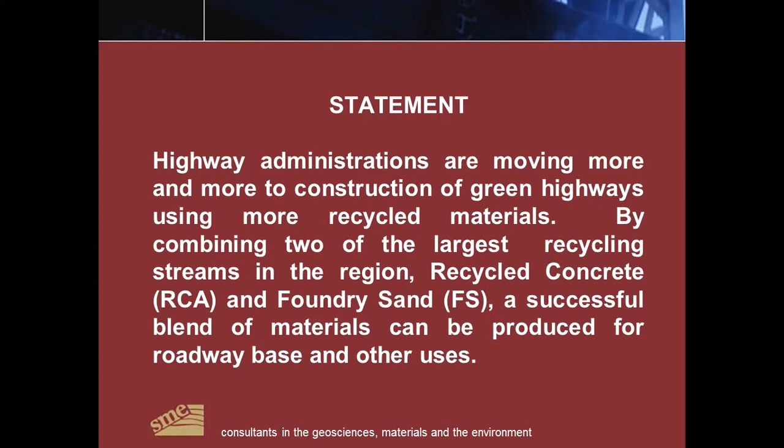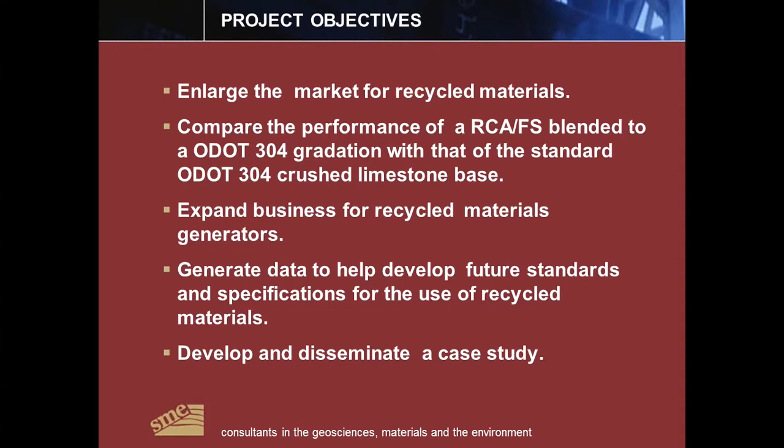The project objectives were to enlarge the market for recycled materials, to compare the performance of a recycled concrete foundry sand blended aggregate, blended to an ODOT 304 gradation, with that of the standard ODOT 304 crushed limestone base, to expand business for recycled material generators, to generate data to help develop future standards and specifications for the use of recycled materials, and to develop and disseminate a case study.

Our project was a Rails to Trails project located in Cuyahoga Heights. The location is a suburb of the greater Cleveland area. It's located just north of Interstate 480 and east of Interstate 77.

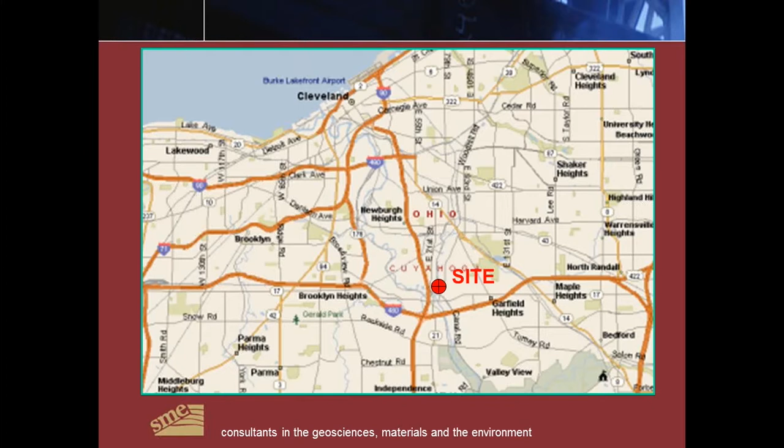This aerial photograph shows the old railroad subgrade with the track still on it. Our project area, our demonstration area, is the area marked in red. The Cuyahoga Heights maintenance garage is located here. After this picture was taken, they constructed another maintenance building, and in 2012 they constructed an access road off of our main entrance into the facility here.

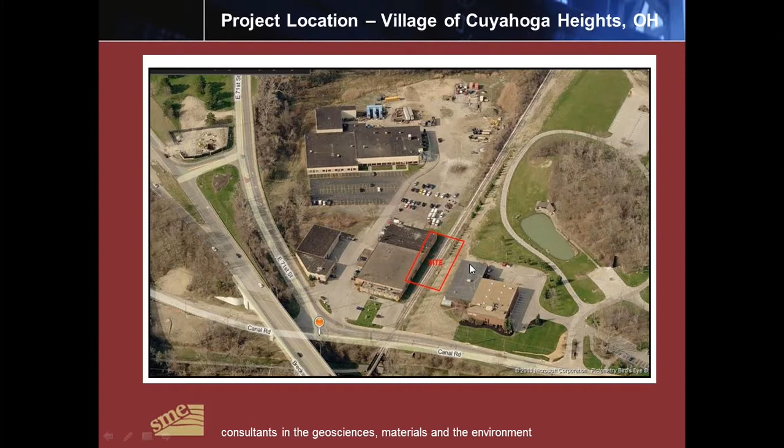This plan view shows our actual test section areas. This first section here is the standard ODOT 304 limestone. The second section here is the recycled concrete foundry sand aggregate, and we had a third section with a different material in it. As part of the original study, there were soil borings conducted along the railroad right-of-way, and in addition to that, there were several static cone penetration tests probed into the subgrade to give us a better understanding of the relationship of the subgrade to the natural subgrade.

As part of the project, we also installed two lysimeters located under each of the primary pavement sections, called lysimeter A and lysimeter B, and we collected groundwater flow through the base course and did analytical testing on those water samples.

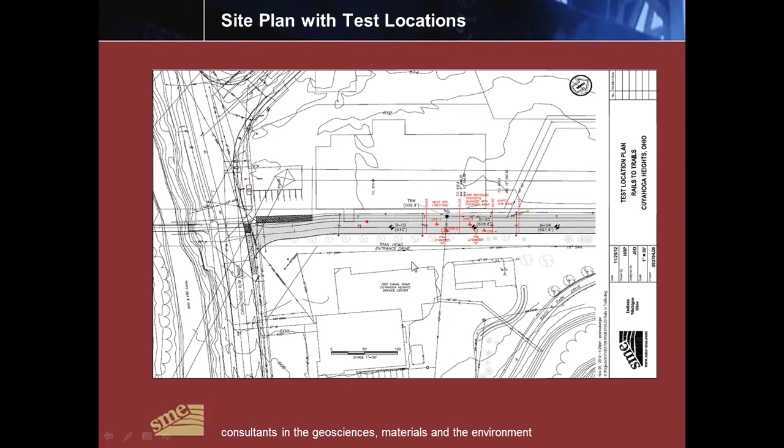This is just a view looking south back towards the main road. Our crushed aggregate limestone is in the first section. The second section here is our recycled concrete foundry sand blend. These arrows are pointing to the approximate locations of where the lysimeters are placed. The subgrade slopes from the right side of the photograph down to the left, and then along this left edge is constructed a French drain collection system to help keep the base course permanently drained beneath the pavement.

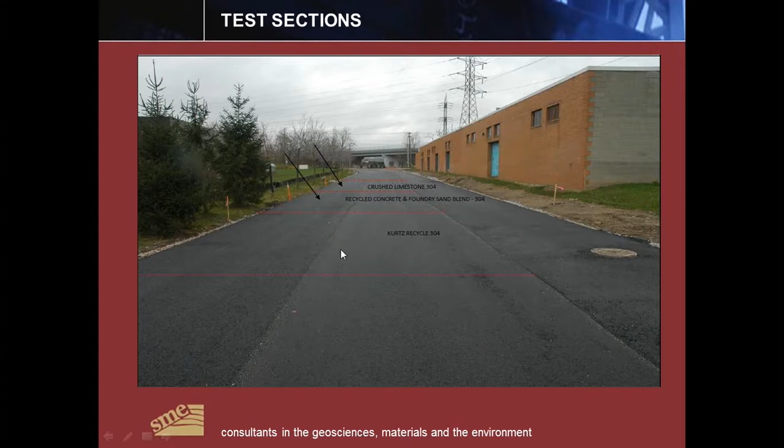Our subgrade was a railroad ballast that was placed in the early 1900s. Back at that time in the greater Cleveland area, they used a lot of cinders and slag mixed with coal and other building material. This profile here is fairly standard throughout the section. There's about 5 feet of this fill, and it's placed over a soft to medium consistency clay. Generally, the fill material was dry. We have not seen groundwater accumulating in the base over the top of the subgrade.

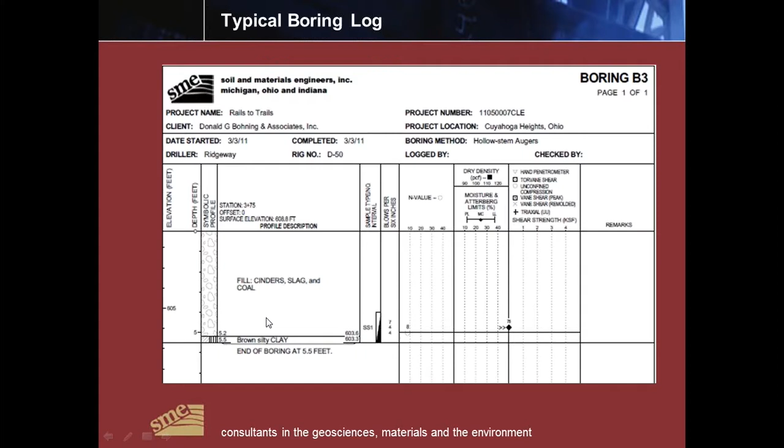Static cone tests revealed that we have an upper layer here, which is the fill, and it shows a nice granular crust by the cone resistance, followed by a weaker profile for the clay. Generally, these cone resistance numbers, when they're 20 or above, you would assign just a basic bearing pressure of about 2,000 pounds per square foot for this material.

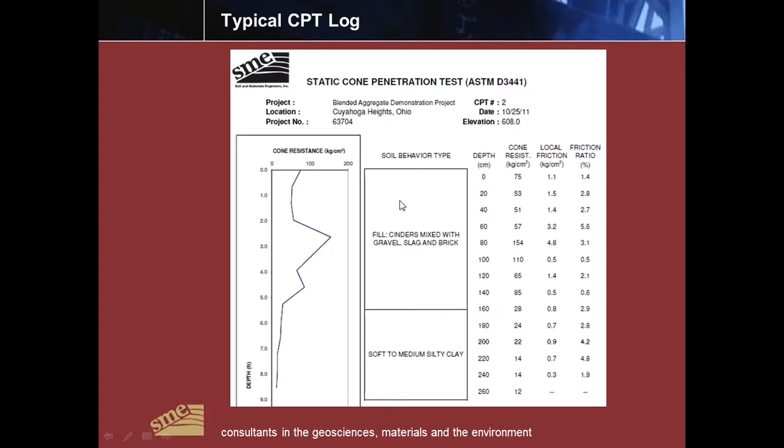The project had a design pavement section that we had to incorporate into the study. It consisted of 10 inches of asphaltic concrete, made up of the surface, intermediate layers, and the bituminous base, placed over 10 inches of ODOT 304 crushed limestone as specified. In our situation we kept the base course thickness uniform throughout the test sections.

With the ODOT section here, it has a calculated equivalent structural number of 5.08. Keep this number in mind as we get into the falling weight deflectometer test later on, where we'll compare that to the design number.

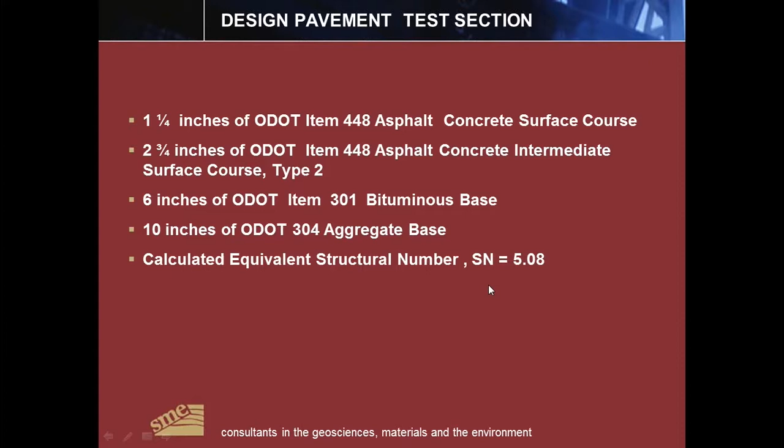We did several laboratory tests on the different materials in this project, including the subgrade fill cinder material. It had a low CBR of 2, a high percent passing the 200 sieve at 23%, which is predominantly a silty material, not clayey. It's a relatively light relative density of 101 pounds per cubic foot and an optimum moisture content of 18%.

We didn't run a lot of other tests on the recycled concrete other than an initial gradation and a fines content, so that we could take the recycled concrete and break it into different constituents and blend it with the foundry sand. Our foundry sand material had a CBR value of 18.

The foundry sand had 9.5% passing the 200 sieve. Typically with foundry sands in our area, this number is usually around 2 to 3%, but the source we were using for this project was slightly higher. It also had a little higher maximum density than normal, which was usually about 109 pounds, and our optimum moisture content was slightly higher than typically seen for foundry sands.

Our blended aggregate, the 304 recycled concrete with the foundry sand, had a CBR of 34, P200 of about 8%, density of 119, with an optimum around 13.

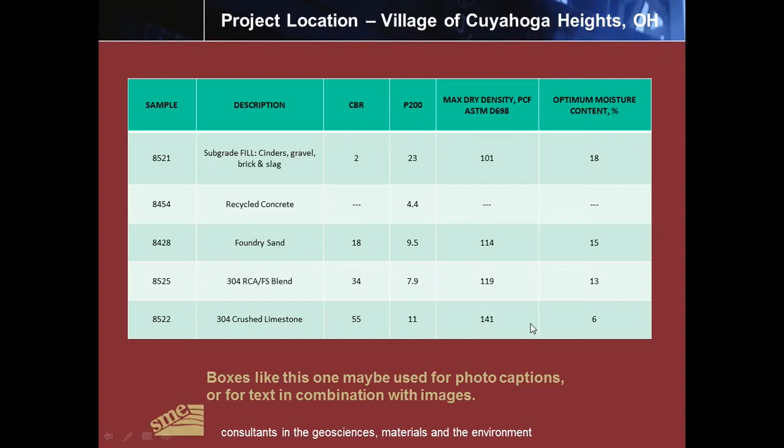This is just a gradation curve for the subgrade material, showing that it is a well-graded cinder material that is predominantly granular.

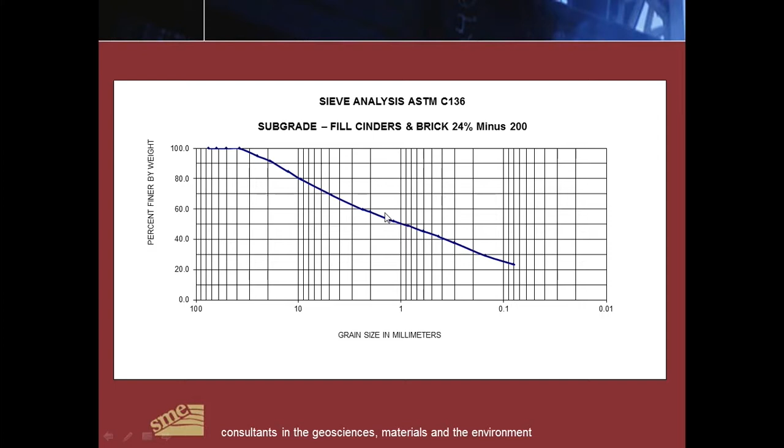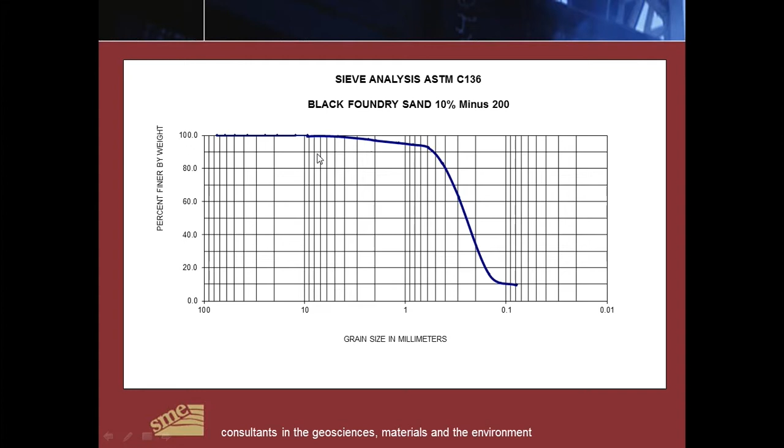This curve is for the foundry sand constituent. It shows that the foundry sand material is a poorly or uniformly graded material with about 10% fines in it. Again, typically our foundry sands run cleaner than this, but in this project we're using a certain source of material.

The final combination of materials shows the ODOT gradation with the upper and lower bounds in red. The yellow or orange curve here is the ODOT limestone material, showing a pretty well graded material with less coarse aggregate in it than what our blended material has. So our blended material had a little bit more top end sizes in it and was cleaner than the standard 304 material that we used.

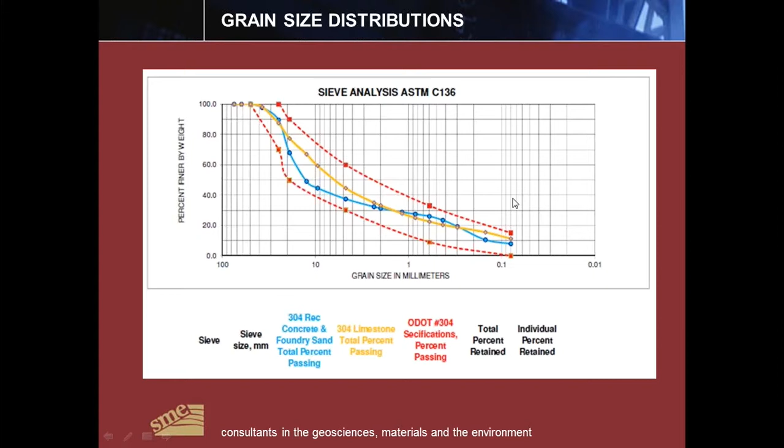In preparation for the road bed, the railroad ties and rails were removed, and the coarse ballast at the top of the pavement was stripped. The subgrade was then heavily proof rolled and compacted with a vibratory drum roller. The proof roll was stable under the loaded aggregate trucks, but you'll see later that the compaction or density tests are lower than what you might expect.

Once the subgrade was stable by proof rolling, we cordoned off our sections, installed the lysimeters, and then placed our base course materials. Once the base was placed, we used a smooth drum vibratory roller to compact the materials to obtain their final densities, then placed the asphalt layers over the top and tested the asphalt.

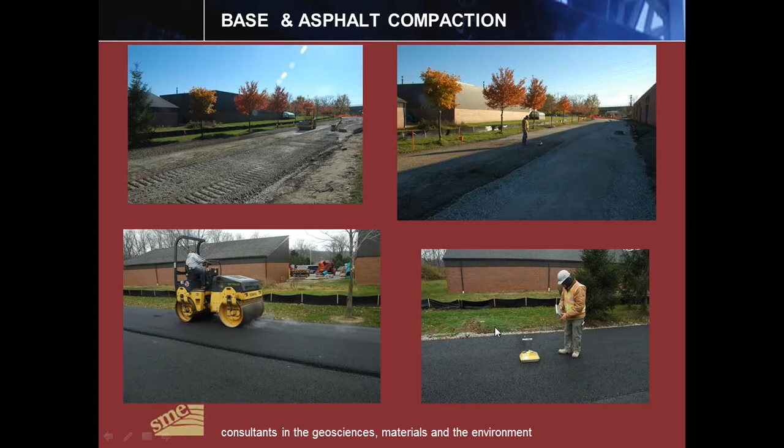The compaction results are as follows. The subgrade material, the cindery material, only achieved a compaction of 81%. You can see that its optimal moisture content was at 18%, and we were 2% over optimum, which makes this material a little more difficult to get greater densities.

But like I mentioned earlier, the subgrade was stable under the proof rolling with the loaded tandem axle dump trucks. The limestone section obtained 95% compaction, and the recycled concrete aggregate achieved 99% compaction. The additional rolling on the limestone did not improve the density any further, so we reached a maximum density with the size of equipment they had on site.

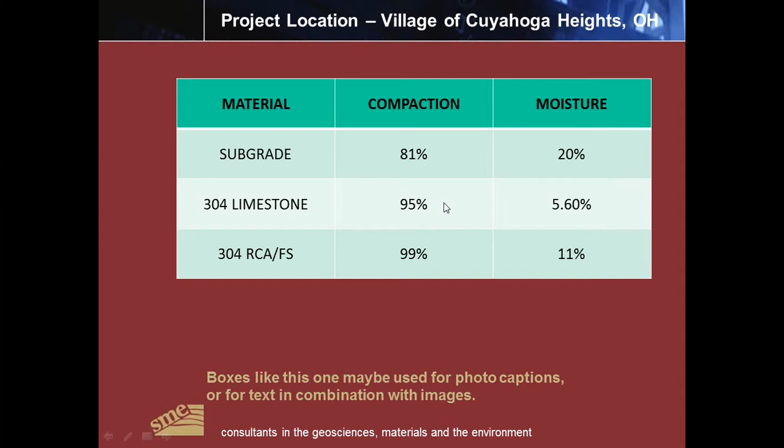Once the pavement was completed, and this paving project was completed in December of 2011, we ran falling weight deflectometer tests on the pavement on both the inbound and outbound lanes. The inbound lane is called lane 1, and the outbound is lane 2.

Lane 1 is closer to this lower edge of the asphalt where the curb drain is located. Right now the position of the truck is really sitting over lane 2.

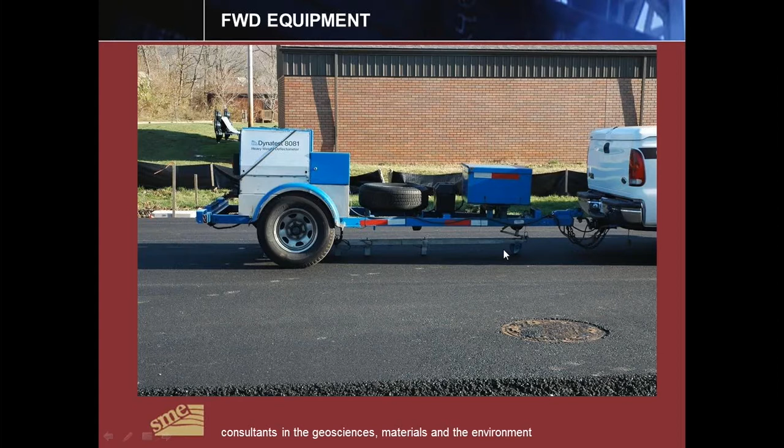You can see on the falling weight deflectometer equipment you have sensors along this bar that are picking up deflections as the test is conducted. This is just the back of the deflectometer showing the foot that imparts the load into the pavement. This is the weight that is lifted and dropped, and then we have another sensor down here for checking the temperatures of the pavement at that time.

Right now the truck is set up on the inbound or lane 1. You can see its relative position to the edge of the pavement or where the curb drain is.

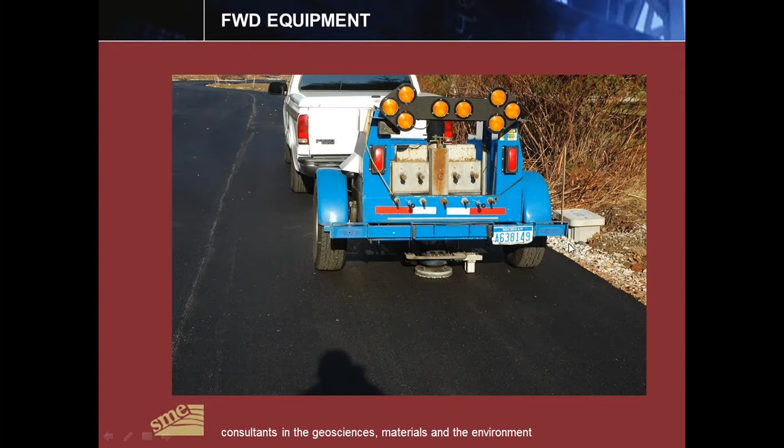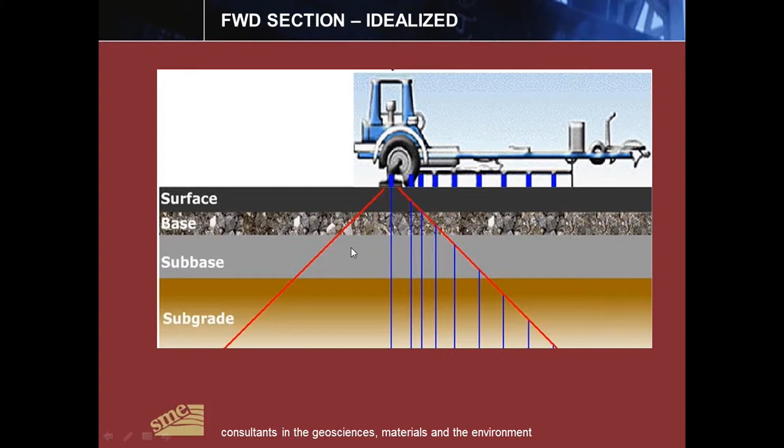Falling weight deflectometer imparts a load into the subgrade. That signal is sent down through the subgrade and is picked up through the deflections of these sensors along the trailer here. The maximum depth of this heavyweight deflectometer is capable of sensing things down to about 15 feet. From that, the data can be analyzed and the pavement materials or sections can be removed from the overall data.

This presents the data after our test in December of 2011. This data is not temperature corrected to 70 degrees; it's the original temperatures that the pavement was at the time of the test. You can see the upper number here plots lane 1 and lane 2. You can typically see on these curves that lane 1 numbers are lower than the lane 2 numbers. We think this is due to the proximity to the edge of the pavement and also to the trench drain that runs along that edge.

The average structural number for the limestone paving test section was 4.28, whereas the average structural number for the recycled concrete aggregate foundry sand blend was 4.32. Rounding these off, you can see that the structural numbers were essentially equivalent. This demonstrates that initially the recycled concrete is working or functioning as a structural part of the paving section as well as the limestone base material.

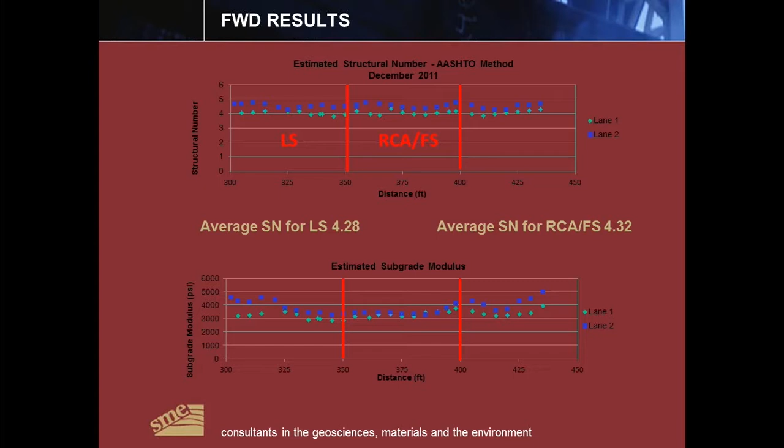We came back in July of this year and ran another falling weight deflectometer test, after 2 winter cycles on the pavement section. This graph plots, there are 2 separate figures I'm going to show here, and this one is for lane 1, temperature corrected to 70 degrees, so the 2011 data is corrected to the temperature that the 2013 data was. You can see that the structural number for the limestone started at about 4.04.

There was a slight loss in structural number over the last 2 winters on this section, whereas the recycled concrete foundry sand blend had just a slight increase in the structural number over this two winter period. And this is for lane 1, the lane that's by the outside edge of the pavement.

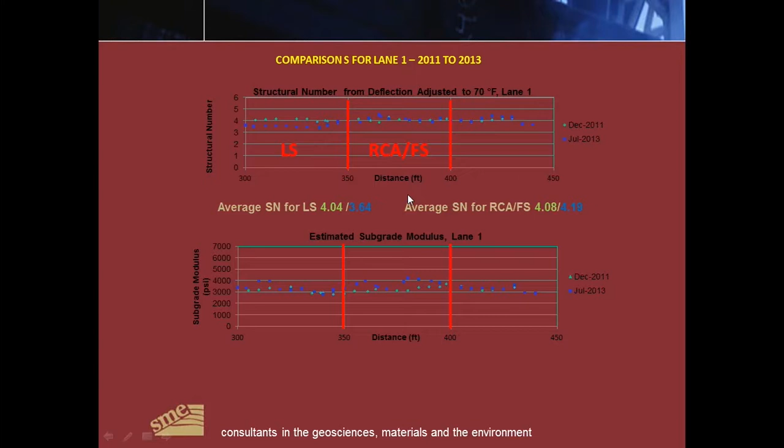On lane 2, you see similar results at the 2013 numbers for the structural number are decreased from what they were in 2011. Again, the average structural number for the paving sections for both lanes was 4.55 for both the recycled blended material and the limestone, but you can see that there was a slightly greater decrease in the structural number for the limestone section over 2 years as opposed to the recycled concrete foundry sand blend material. It shows that comparatively both these materials are functioning as you would intend.

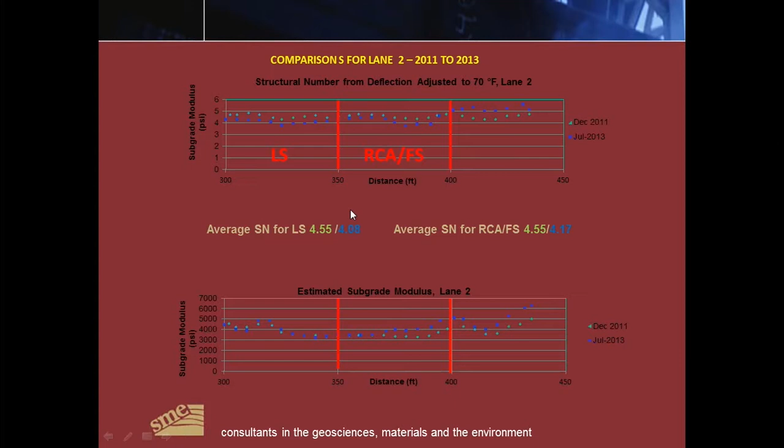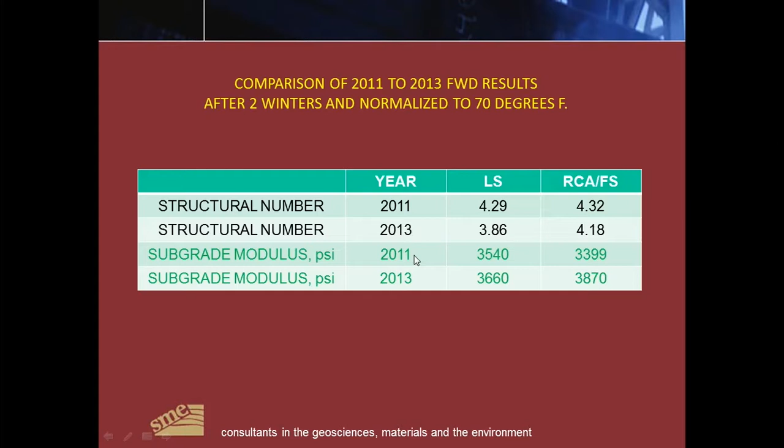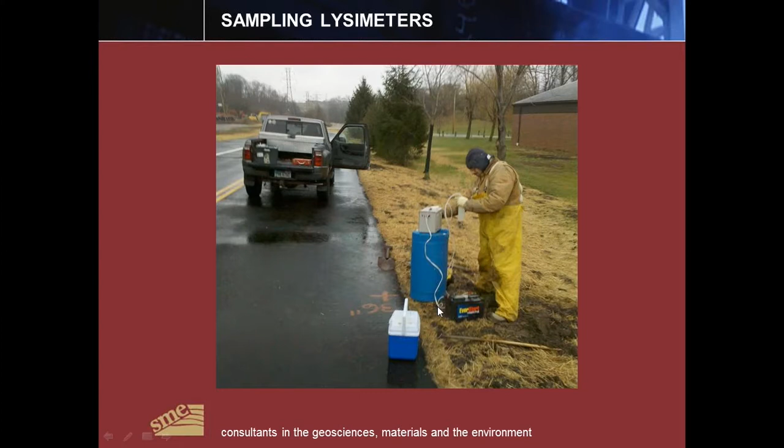As part of the study, we collected water samples in our lysimeters, the groundwater that flowed through the base course. The lysimeters are located beneath the pavement in this area. We have a collection tank just outside the pavement that we can insert a hose into and pump the leachate out of our containers. Once the samples were obtained, we measured the quantity of material taken out, the temperature, the conductivity, and then we sent these to an analytical laboratory and tested them for the heavy metal constituents.

Lysimeter A, as I mentioned earlier, is under the limestone, and lysimeter B is beneath the blended materials. You see that initially we had some readings in all of our heavy metals on the first go-around of sampling. But after the second sampling, the barium, cadmium, and chromium numbers all dropped down to non-detect limits, but the arsenic levels still remained high. It should be mentioned that in Ohio arsenic is a naturally occurring background material in our soils and groundwater, so it's pretty typical to see arsenic show up in places you normally wouldn't think you'd see them. Studies by the University of Wisconsin on recycled concrete aggregates compared to natural aggregates show the same trend of readings.

Initially, it appears that the arsenic levels were higher in the recycled aggregate blend as opposed to the limestone, and that over time the limestone cleaned up faster. We believe this is primarily due to the amount of water collected; more water flowed through the limestone base than through the blended foundry sand concrete base. It's worth noting that the pH on the limestone materials is around 7, where you'd expect it to be.

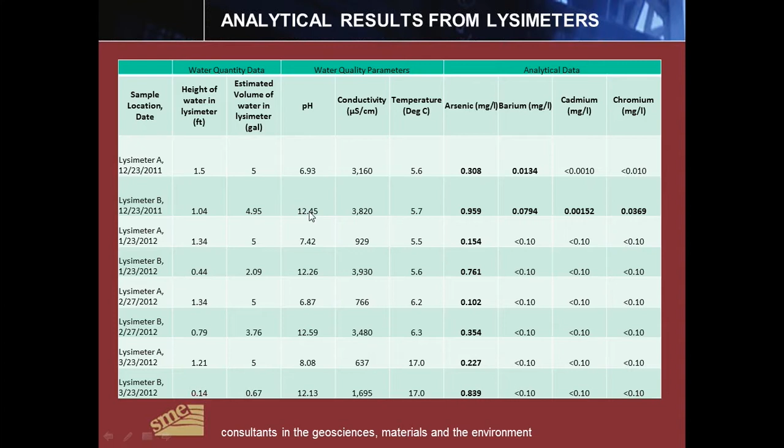The pH on the recycled concrete foundry sand is up around 12 to 13. This is due to the concrete material in this blend, and this high pH is typically what you would expect for concrete materials.

In summary, falling weight deflectometer data indicates that the recycled concrete aggregate foundry sand blend for the base course functions as well, or maybe even slightly better, than the standard ODOT 304 crushed limestone when placed over the same subgrade materials.

Refining the recycled concrete foundry sand gradation through more controlled processing, better crushing, and blending methods may produce an even better base material with further study.

Finally, the analytical test results for metals are very similar for both materials, but are higher for the recycled concrete foundry sand base. Again, we believe this is really due to the amount of water that actually permeated through the base and was collected.

With that, I conclude the presentation and now open it up for discussion or questions.